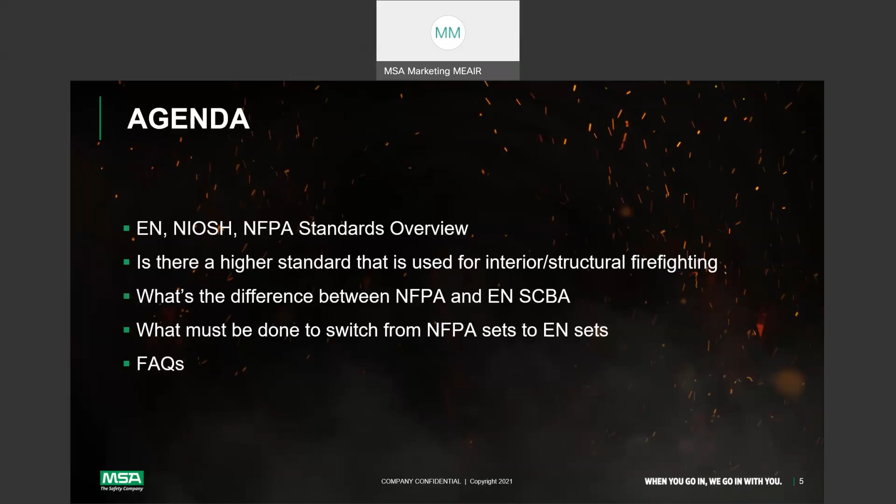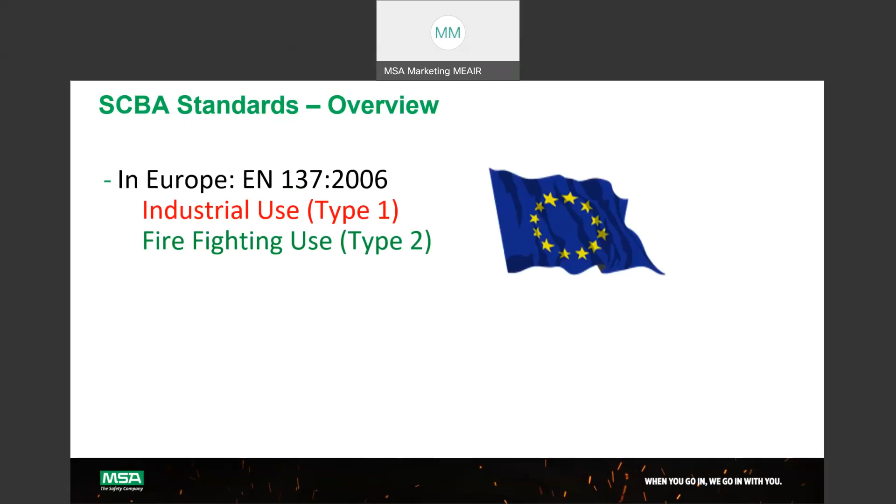First, let's have a very high level standards overview. When we talk about SCBA standards, one is on the European side, the other on the American side. On the European side, we see EN 137:2006, that is quite common. Under that, for industrial use type 1 is preferred, and for firefighting use type 2. Similarly, in the USA, NIOSH 42 CFR Part 84, Code of Federal Regulations, for industrial use, plus NFPA 1981, 2018 edition for firefighting use, which includes CBRN testing.

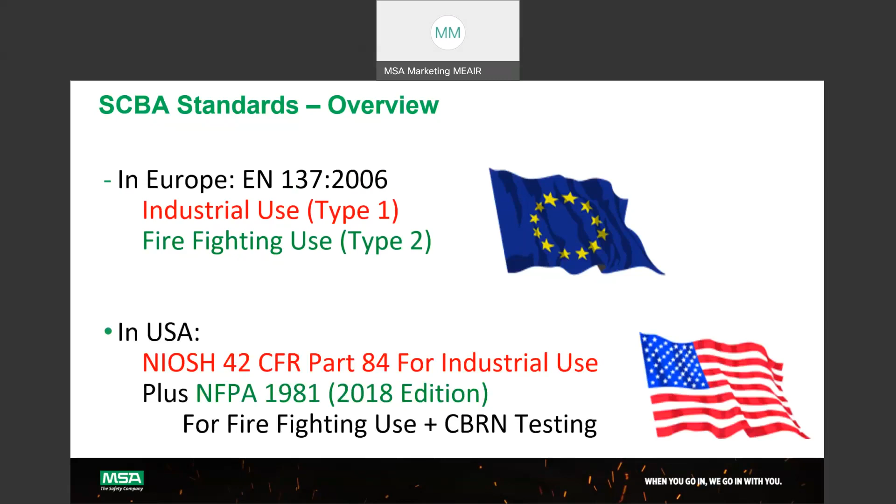One would wonder, what is this SCBA all about? SCBA, as most of you are aware, is a self-contained breathing apparatus set. Sometimes in the field, people simply say BA set, or SCBA, or CABA, compressed air breathing apparatus. Self-contained breathing apparatus sets manufactured for firefighting, safety, search and rescue applications are certified to safety and health standards worldwide. Regulatory requirements and voluntary standards used by many nations for approval fall into two major groups: North American and European.

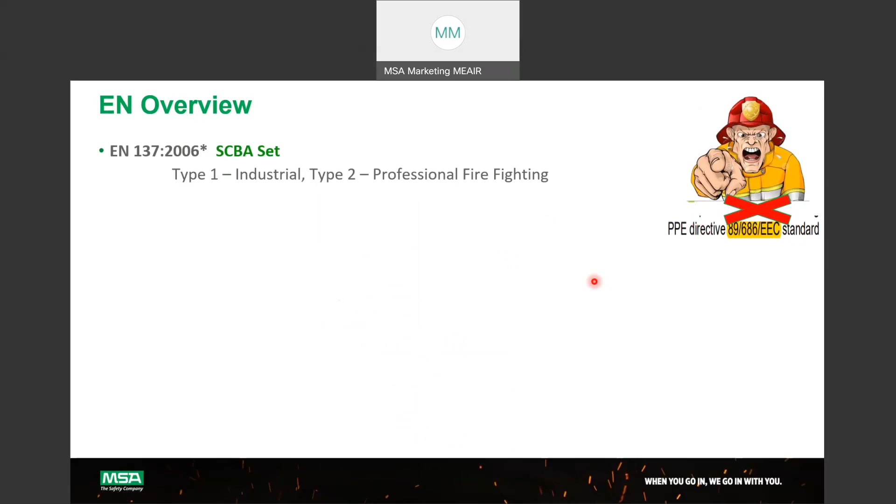So let's look at the European side, the EN 137:2006 SCBA set. If you happen to look at specifications for an SCBA in compliance with PPE Directive 89/686/EEC, this is no longer valid, and it has been changed to the new directive. We will have a look at that in the following slides. Type 1 is for industrial use, type 2 for professional firefighting. What is interesting in the EN SCBA set is that, though we simply say EN 137:2006 compliant, the individual components like the face mask and cylinder valve each have their own standard they comply with.

For the face mask, EN 136:1998 is followed. Under that, we have class 1, class 2, class 3, and class 3 plus. 1 and 2 are general use, short-term use, and 3 for special applications. Firefighting is considered a special application, so your mask shall have class 3 certification. Class 3 plus means the product goes through the flame engulfment test. So most masks will have class 3 plus.

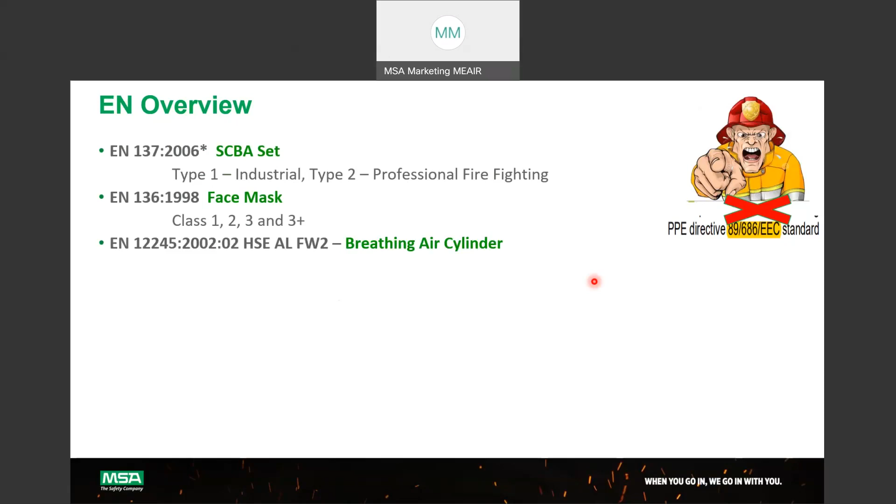For the breathing air cylinder, we have another standard, EN 12245:2002. Under that, we have type 1, type 2, type 3, and type 4, the latest one. Type 1 and type 2 are quite common: steel or aluminum cylinders. The most popular at the moment is type 3, which many customers call a lightweight or carbon composite cylinder. That means you have an aluminum inner liner. We will see that in the following slides.

Type 4 is gaining popularity. Type 4 is a PET cylinder. That means the inner aluminum liner of the type 3 cylinder is replaced by PET, polyethylene terephthalate. That provides light weight and hygiene. There are certain features we will also look into.

For the cylinder valve, EN 144-1: part 1 threaded connection, part 2 outlet connection. Mostly our point is on part 1. The cylinder valve has additional features or components, depending on the customer's requirement.

These options are incorporated into the cylinder valve. The first one is an EFV. EFV means excess flow valve, and then an integrated pressure gauge, and then overpressure protection or the burst disc, and then a ratchet, spring-loaded or anti-closure mechanism. People simply call it a locking valve.

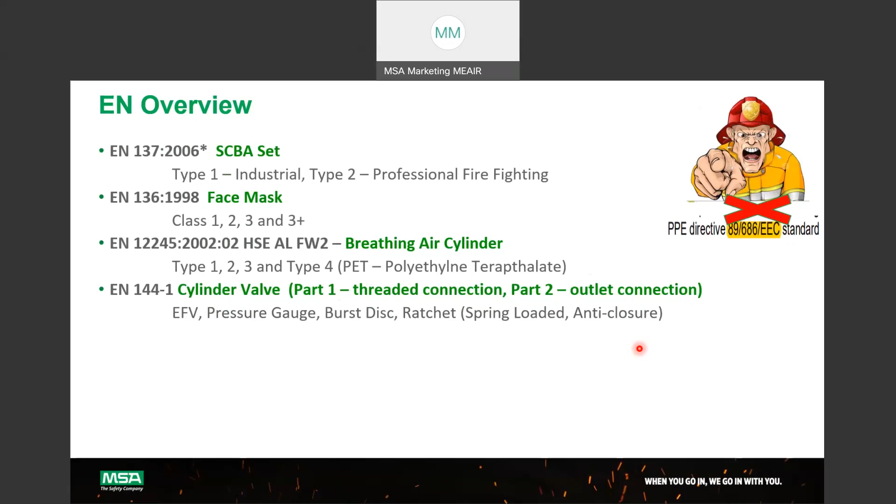So it is normally open, and if you want to close it, you need to pull and twist or turn. This is quite handy, especially for customers when they use the cylinders in confined spaces, or if they are going through a narrow space. It prevents accidental closure of the valve. And the integrated pressure gauge obviously helps you understand the high pressure inside your cylinder. The burst disc obviously helps with overpressure.

And for breathing air quality, we have EN 12021; 2014 is the latest one. Under this breathing air quality standard, you test water, oil, water vapor, oil mist, CO, CO2, odor, taste, plus oxygen. These substances have to be tested periodically, once in 3 months, once in 6 months. The standard calls for a specific period, and many customers implement it according to their usage in the field.

Okay, the new PPE directive is here, Regulation (EU) 2016/425 of 9 March 2016, that covers the design, manufacture, and marketing of PPE, that is personal protective equipment. When we say EN, the European Committee for Standardization, or simply CEN, an international non-profit trade-related association, provides a platform for the development of EN standards and other technical specifications. Common European standards reach a large population with reduced development and testing costs. CEN offers voluntary European standards, ENs, such as EN 137:2006.

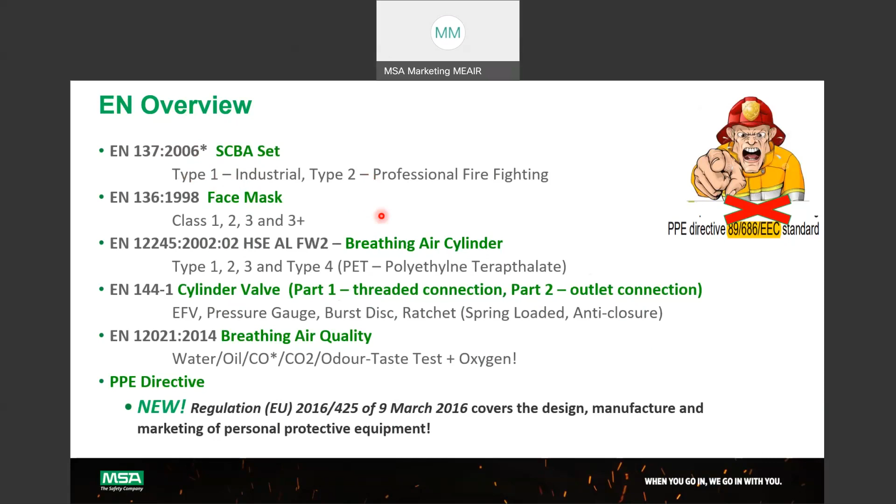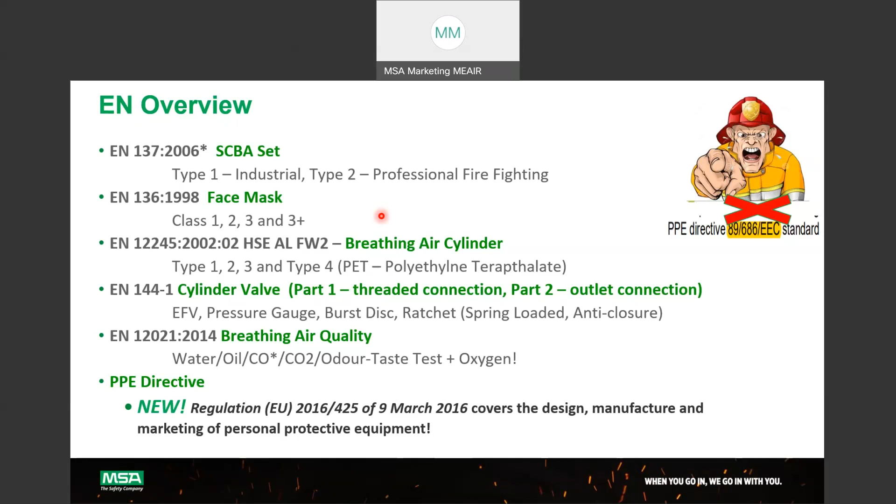Moving on to the other side, that is NFPA 1981, 2018 edition. In NFPA, once in 5 years they review the standard and upgrade it based on customers' and manufacturers' feedback. Most of the sets supplied in the market are 2013 edition. From the MSA perspective, our G1 SCBA is 2018 edition approved. But when we supplied it from 2014, 15 until 2019, most of the features had already been included. That means the unit was almost compliant with the 2018 edition, except one point, which we always talk to our customers about: the universal emergency breathing supply system, or simply UEBSS.

Then when we look at NFPA 1982, this is a separate standard that talks about man-down situations, mainly for electronic devices. NFPA 1982 is standalone in that it is not required for an SCBA to be NFPA 1981 compliant. And for industrial applications, obviously NIOSH 42 CFR Part 84 is the one. When it comes to the additive standard for firefighting, it is high-level performance.

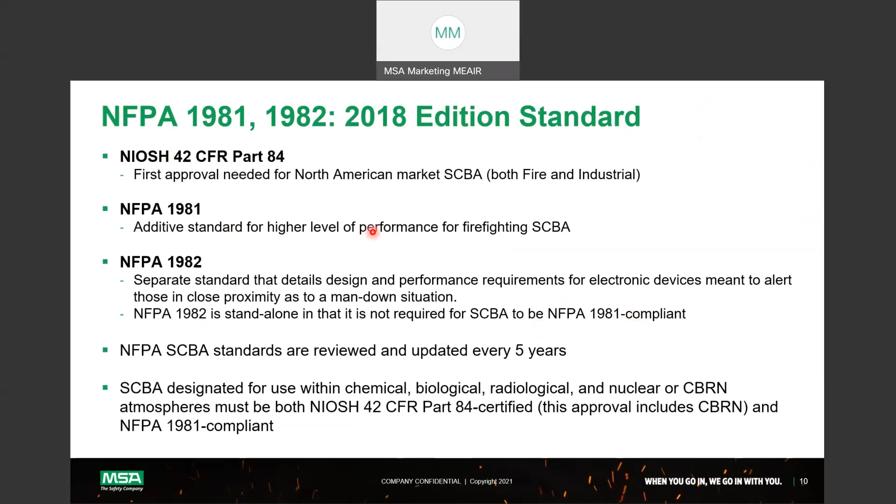Now the question comes, is there a higher standard that is used for interior firefighting? We have seen the EN standard and NFPA for firefighting: EN 137 Type 2, and NFPA 1981 edition 2018. To answer this question, it makes sense to compare the standards between EN and NFPA. The following slides provide a high-level overview of how the tests are followed for both standards.

For the flame engulfment test, the preconditioning temperature is 95 degrees centigrade for 15 minutes in the US, and in Europe, 90 for 15 minutes. Then you can see the 15 centimeter drop after flame, similarly for Europe, but the maximum after flame is 2.2 seconds, and here 5 seconds.

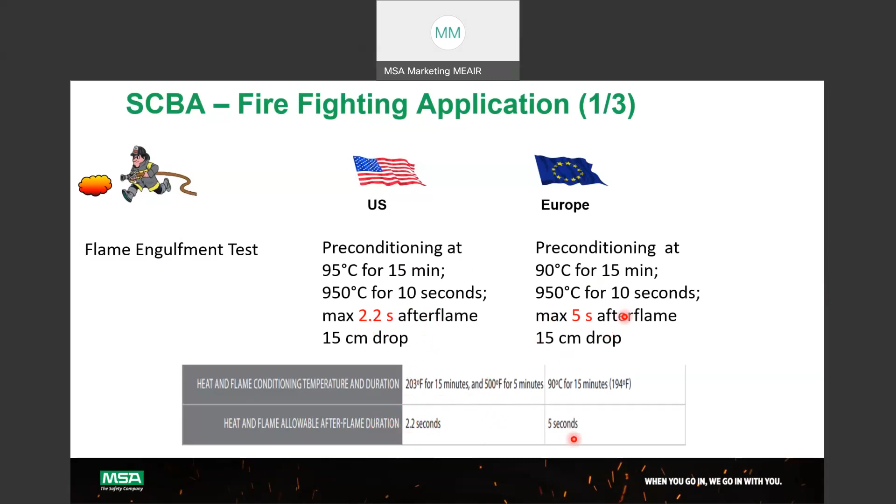So this is what we have compiled here. Heat and flame allowable after flame duration is 2.2 seconds for NFPA, and in Europe it's about 5 seconds. Similarly, if you look at the CBRN performance, on NFPA it was required and mandatory, but when it comes to the European EN standard, it is optional.

But for MSA, the M1 SCBA, the new model we offer from our European platform, has been approved and certified to CBRN performance. That means when you configure your M1 SCBA, you will be able to select CBRN certification. When you select that option, the product is delivered with a label complying to the CBRN performance.

The other interesting point is about a heads-up display inside your mask or face piece. This is required on the US side. When it comes to Europe, this is optional. A few customers are offering it as an add-on version, and a few customers also provide visual images inside the unit.

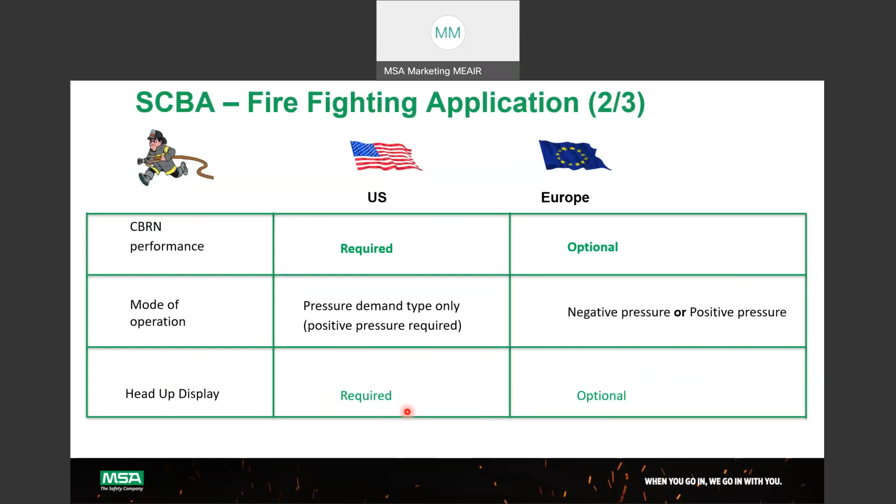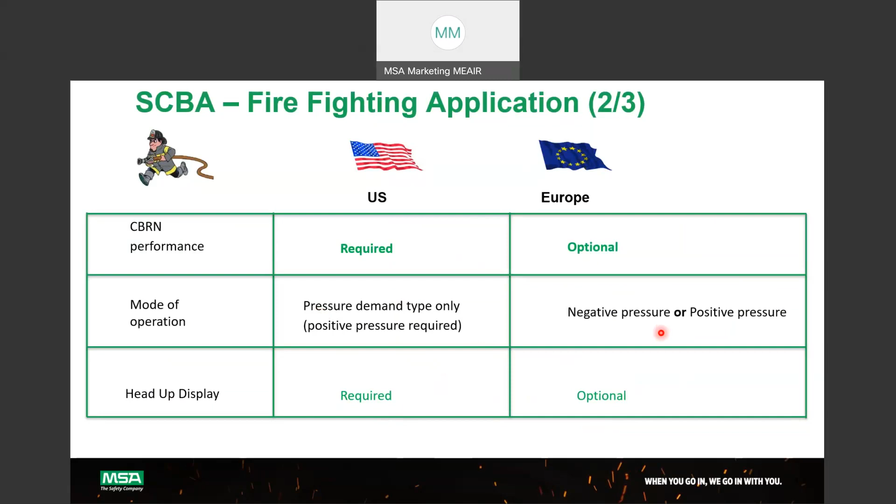In terms of mode of operation for firefighting applications, it's always pressure demand type, that is positive pressure. When it comes to Europe, you have negative pressure or either positive pressure. When you say positive pressure, the pressure inside your mask is always higher than your ambient or atmospheric pressure.

When talking about usage in explosive atmospheres, you can see the electronic components, like here, the 1982, the tests or the specific requirements. And when it comes to Europe, you also have other specific requirements.

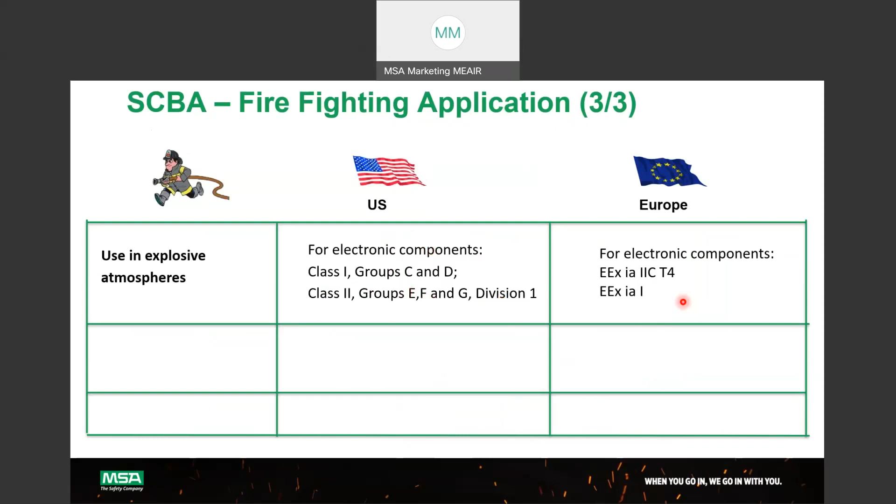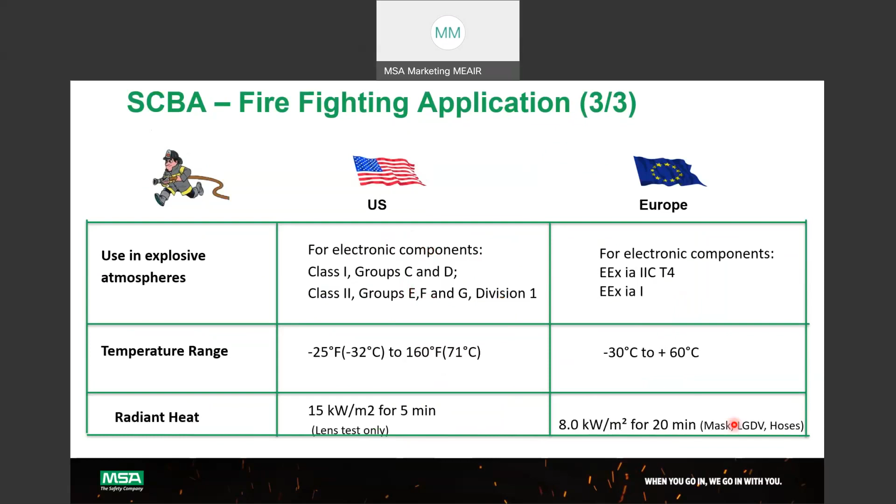Similarly, the temperature range testing and the radiant heat testing, particularly for your lens and the face piece, and also on the European side for your mask, the LGDV or lung governed demand valve, and the hoses, you've got different radiant heat test parameters. This is on the firefighting side.

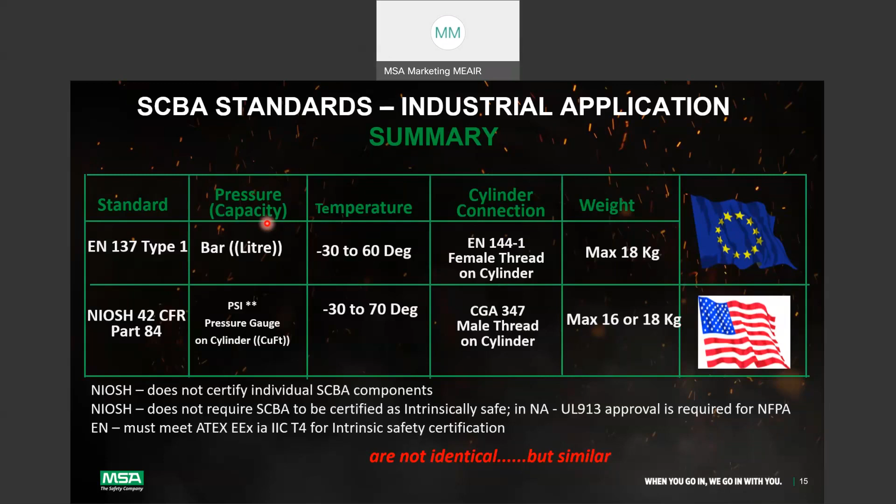If you look at overall, comparing the standards, they're not identical, but they look similar, right? Then you ask, what's the difference between NFPA and EN SCBA? Having seen the standards and looked at what they are, when we look at the difference here, in terms of SCBA basic requirements - let it be breathing resistance, airflow requirements, CO2 content of the inhaled air, or the low pressure alarm or low pressure warning whistle.

Generally, on the European side, if you're using a 45-minute set, you can use it for 35 minutes of working duration, then 10 minutes for your safe duration, that is for escape, getting back to your safe area or assembly area. So like that, 35 minutes and 10 minutes. If you see a cylinder with 45 minutes duration, that means you can effectively use it for 35 minutes, and then in the last 10 minutes you have to get back to your assembly area or safe area. So that last 10 minutes, you will get that warning whistle.

Typically, when the pressure gauge drops down to 55 plus or minus 5 bar, that means 50 to 60 bar, you will get an alarm. That means the warning whistle starts whistling, so then it is understood that you need to get back.

Similarly, on the American side, once the pressure in your cylinder drops down to 33% of filled pressure, then the warning bell or sound happens. That is an indication that it is time for you to get back to your safe area. 30 to 33% of the filled pressure. So these are not identical, but similar. This is the overall similarity here.

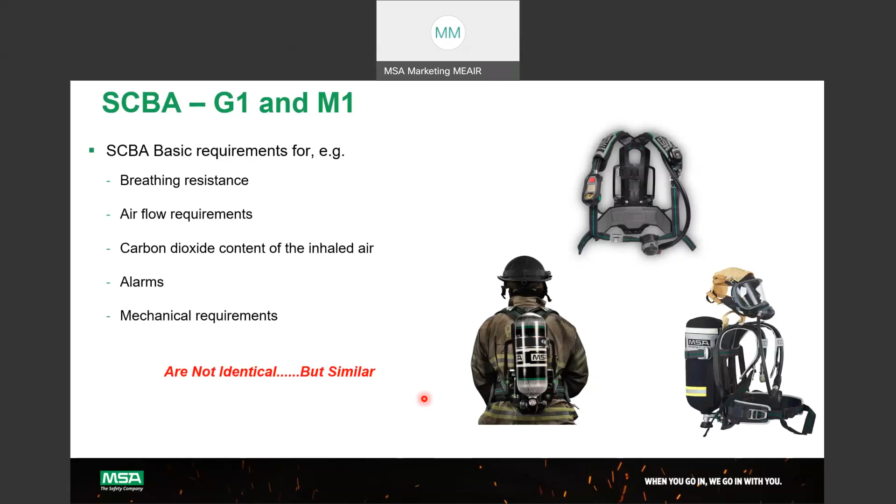Then what about when we start comparing the EN SCBA and American SCBA? We have seen the similarity, not identical, but similarities there. First, let us look at the component level.

The first one is about the face mask or face piece. The terminology usually followed in the European industry is face mask or full face mask, but on the American side they call it a face piece.

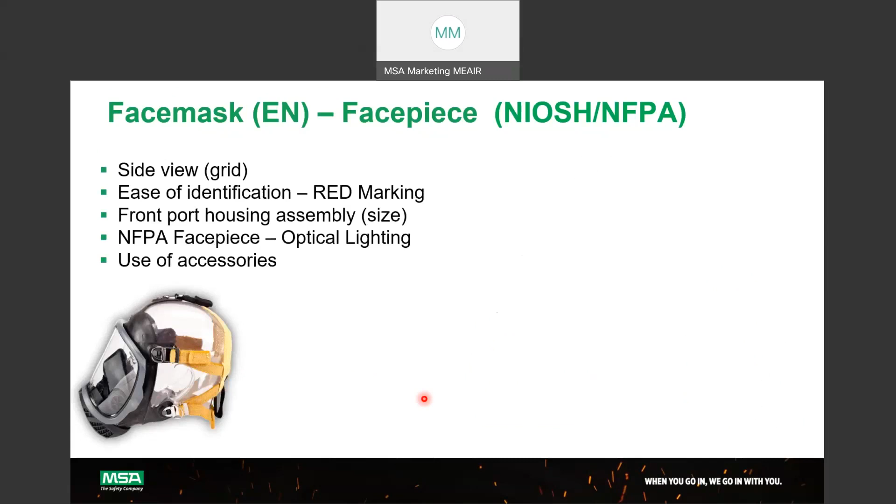When comparing the mask availability for both European and American, we have one mask called the G1 platform mask. On the European side it's called mask, on the American side face piece. So we provide the G1 face mask for European side, G1 face piece for American side. These two masks cannot be interchanged because the front housing or front port housing, which includes your demand valve holder, is totally different.

When it comes to the American side G1 face piece, it has a heads-up display, so obviously the optical lighting and everything makes it look a little bulky. It cannot be fit onto your European mask.

For ease of identification at the field, if someone has a mix of both European and American sets, the European mask has a small red marked button. From there, we can easily understand that this is a European mask, whereas in the American mask you do not see that kind of red marking. And the optical lighting is obviously there, which is not available on your European mask.

In terms of the side grid on the side, because of the front port housing, it is a bit bulky for your face piece. You can see the grid size and numbers are higher, and the size is different, so you cannot use it interchangeably. Though a few components like the inner mask, head strap, or harness can be interchanged, the front port housing and the grid cannot.

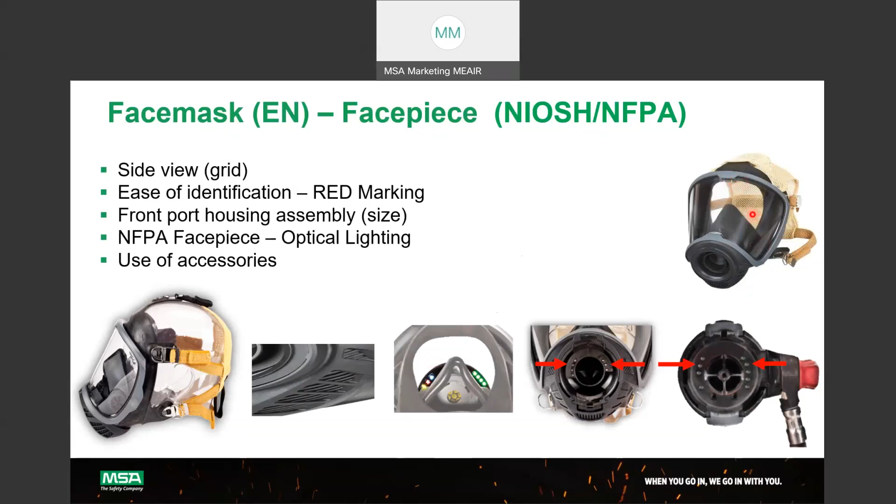The product will be supplied with optional accessories like the optical kit or spectacle kit. If someone wants to use this SCBA or mask with their reading glasses on, we supply that spectacle kit, which can be fixed over there. It fits nicely for the users.

When we look at the cylinders, on the European side pressure is noted in bar, but on the NIOSH and NFPA side it is always noted in PSI. The cylinder water capacity starts from 0.8 to 12 liters, and the 50 liter used for airline trolley units, with pressure always indicated as 200 bar or 300 bar. But when it comes to capacity on the American side, it is known in cubic feet. 1 cubic foot is approximately 28.32 liters.

On the cylinder you can see the marking here: if it's a 30-minute cylinder, you'll see 45 cubic feet. If it's a 45-minute cylinder, you see 66 cubic feet. A 60-minute cylinder, obviously you see 88 cubic feet. The low pressure is 2216 psi, and high pressure is 4500. Also, 5500 psi is offered as well.

We have seen on the European side types like type 1, type 2, type 3, and type 4 - that is steel cylinder, type 3 carbon composite, and type 4 PET cylinder. When it comes to the American side, we have two.

One is the aluminum cylinder, usually used for low pressure. Then the carbon composite, which we also provide for low pressure. And then ultralight carbon composite cylinder is provided for high pressure, like 5500 psi.

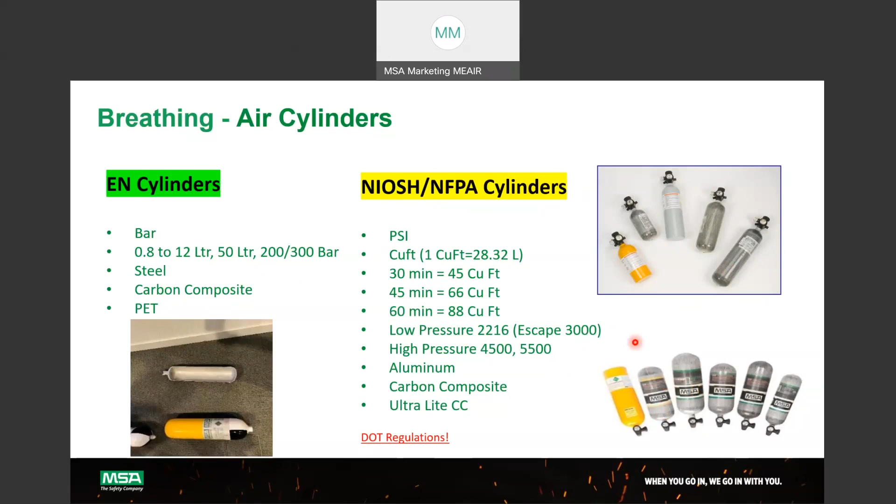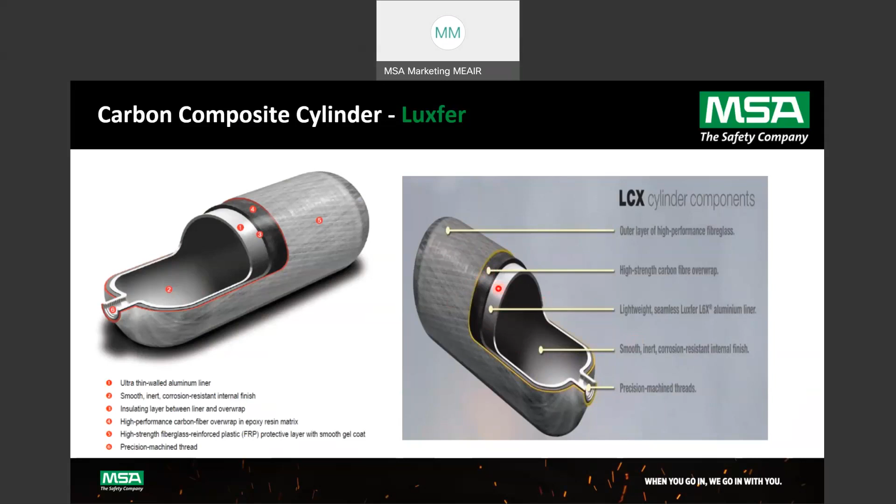And the cylinder is provided with NLL, that means non-limited lifetime. So once in 5 years you carry out your hydro test, and then everything is fine, you can continue to use that type 4 cylinder. This is non-limited lifetime because it has no steel, aluminum or any metal materials, so it's corrosion free, hygienic, pure, and the maintenance is quite easy.

Someone is using a cylinder valve here and they didn't pay attention. They increased the torque, using higher torque than the permitted level. Then what happened? The cylinder neck portion gets cracked. So the moment the crack happens on the type 3 cylinder, that means the cylinder has to be condemned.

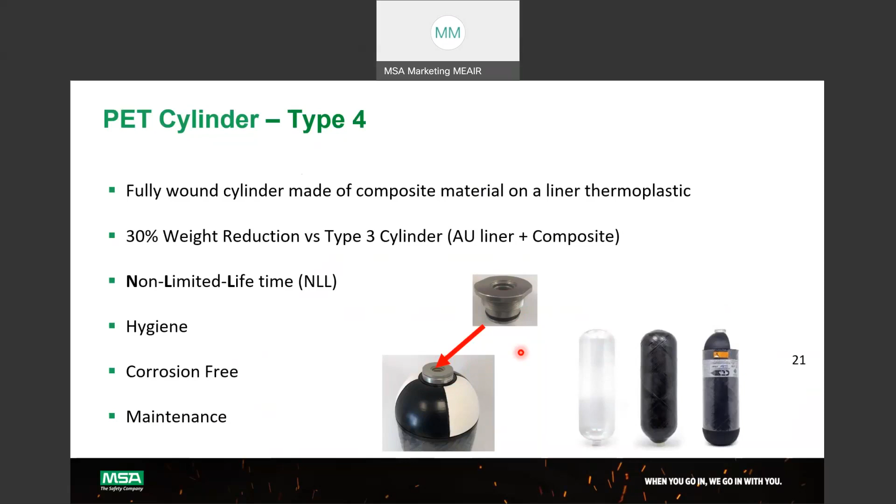MSA is offering type 4, type 3 cylinders for use with SCBA. We have tested specific cylinders, specific branded capacity cylinders. Everything is available in our product certification. We would be more than happy to share that with you.

And on the EN side, we do offer European cylinders with limited lifetime. That means 15-year cylinders, 30-year cylinders we offer, and also NLL, non-limited lifetime. Particularly on type 4, all cylinders are NLL.

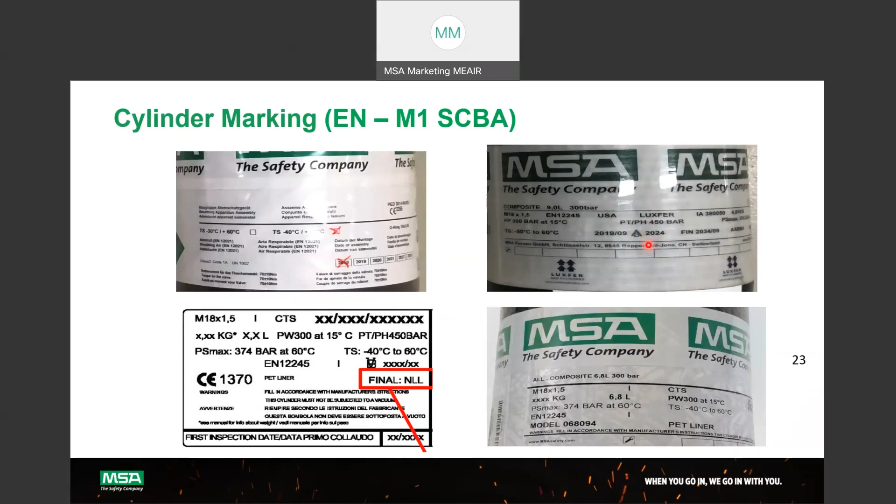We have seen components like the mask, cylinder marking, and cylinder valve. There are different types of cylinder valves available: popular inline, straight, and cross flow valve, right angled or 90 degree. But the most popular nowadays, followed by customers, is inline.

That is what MSA is offering. MSA also offers cross flow and right angled valves. But the most popular, like I mentioned, is the inline valve. Let us understand what are the types of valves.

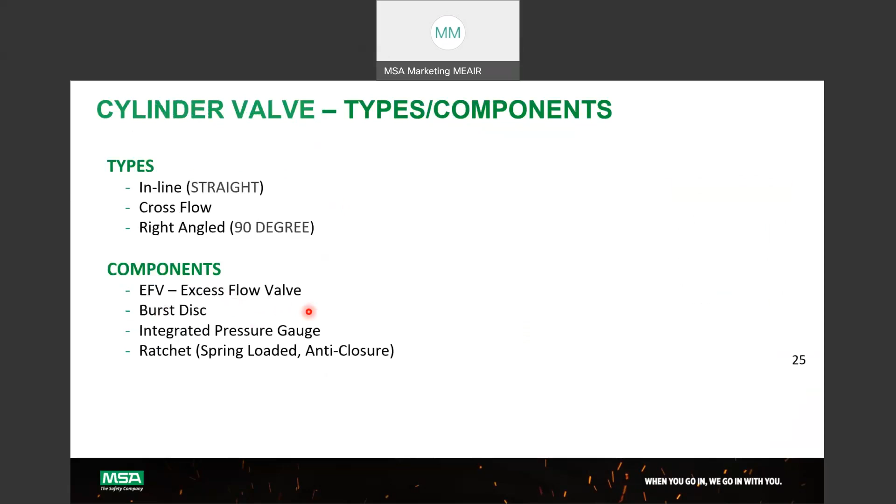Again, the components, we have seen terminologies like EFV, excess flow valve, burst disc, and integrated pressure gauge ratchet. These are optional features offered along with the cylinder, subject to customers' requirement, application, and their interest and budget.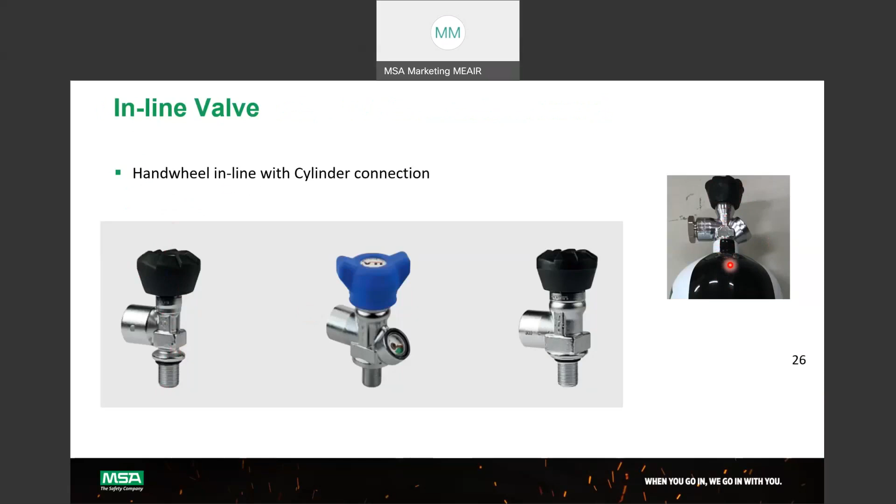This is your inline valve. This is the most popular in the industry. It's followed by many of our customers. When you look at the cross flow valve, that means the hand wheel, you can see here, the hand wheel is in line with the outlet connection. That means, if you want to refill the cylinder here, you use that to refill the cylinder. So this is here, the hand wheel in line with outlet connection. That is your cross flow valve.

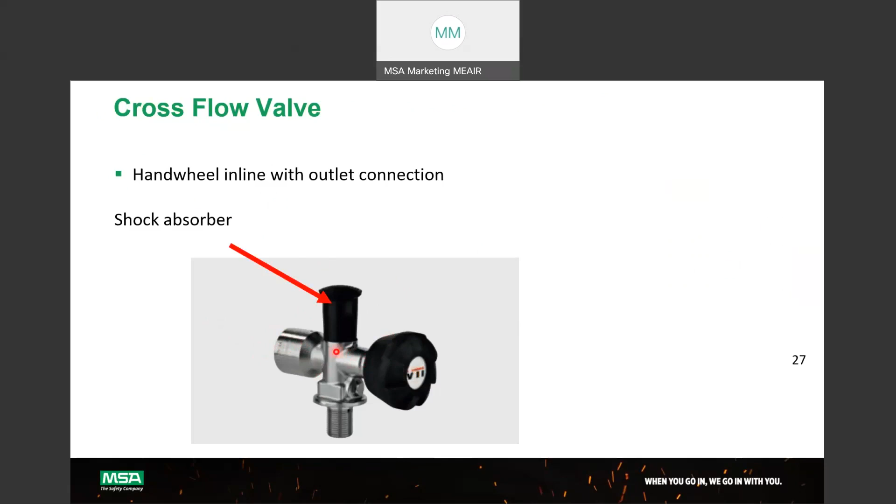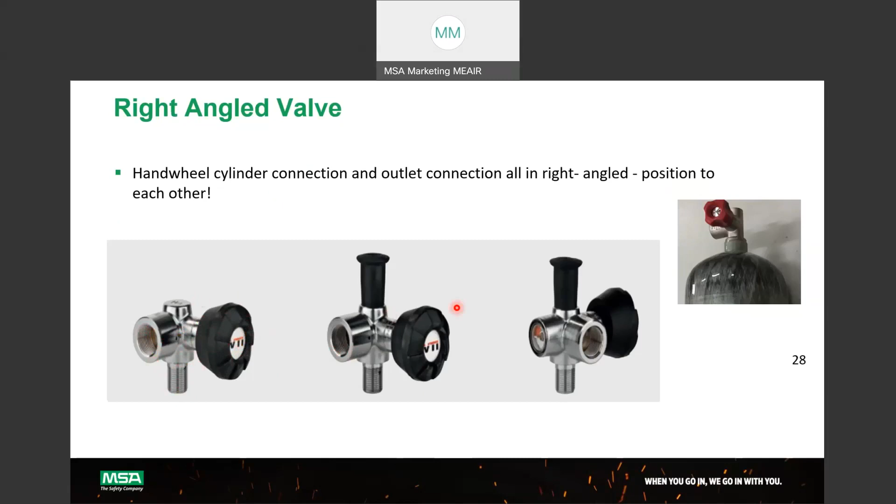When it comes to the right angled valve, here the hand wheel is right angled to your cylinder threaded connection, right? You see here? So the hand wheel, cylinder connection and outlet connection are all in right angled position to each other, right? So here, here, here. So this is what we call a right angled valve. A few images for ease of understanding. You can see the right angled valve, inline valve.

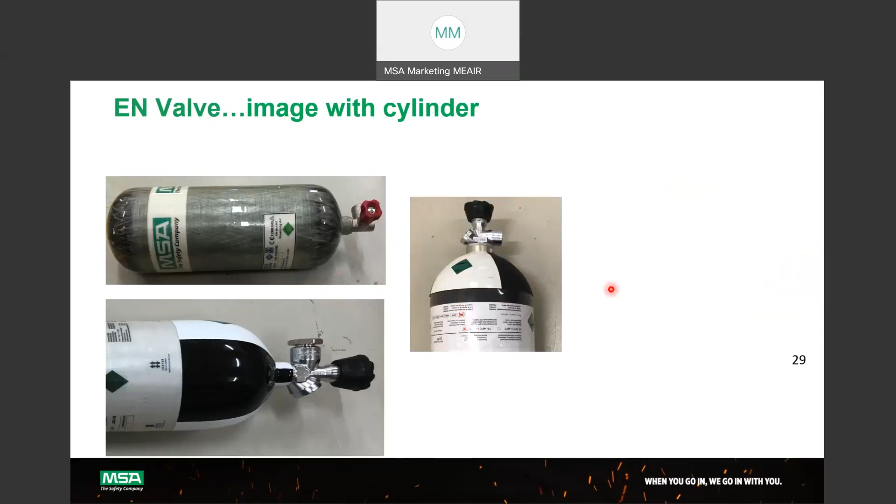Okay. And then the optional features we offer for the cylinder valve. You can see here the integrated pressure gauge. From this, we can easily understand what is the pressure inside your breathing air cylinder. You don't have to take this cylinder, fit it onto your SCBA, open the cylinder valve and look at the pressure gauge to see the pressure inside your cylinder. That is typically what was followed in the past. But now, since you have this option, you can easily see the pressure inside your cylinder without opening the valve. All right, that's the integrated pressure gauge.

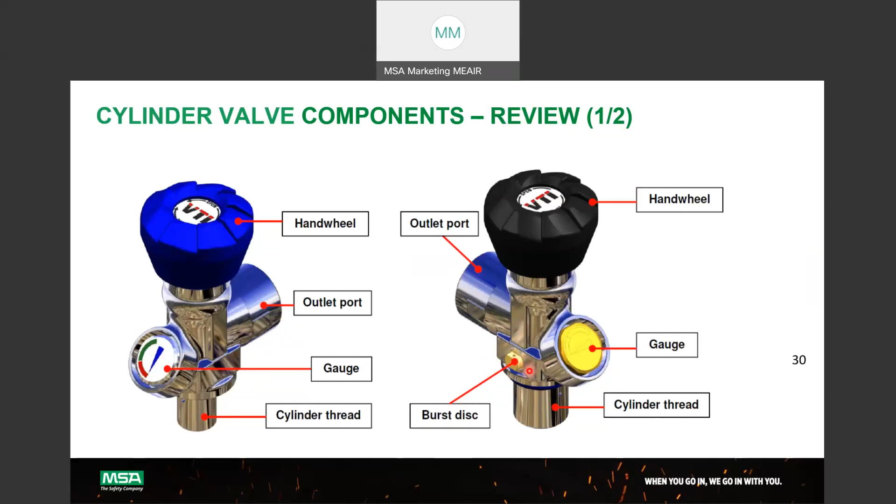Then what we have is the burst disc. Say someone has lost their attention while refilling, and the pressure got increased more than the specified pressure. So in order to prevent the cylinder bursting, the burst disc is provided here, right? And then we have a few other points. The other one we talked about is the excess flow valve, right? The excess flow valve is here. We will also see what options are available.

And the other one we talked about is the ratchet. The ratchet is normally here inside the valve. So in the valve itself, you have a spring-loaded or anti-closure. That means, like I mentioned, you can normally open, but in order to close, you need to pull and turn. Okay, pull and twist. So with this, it is quite handy for you to use the cylinder or SCBA in confined space or narrow space. It's quite handy.

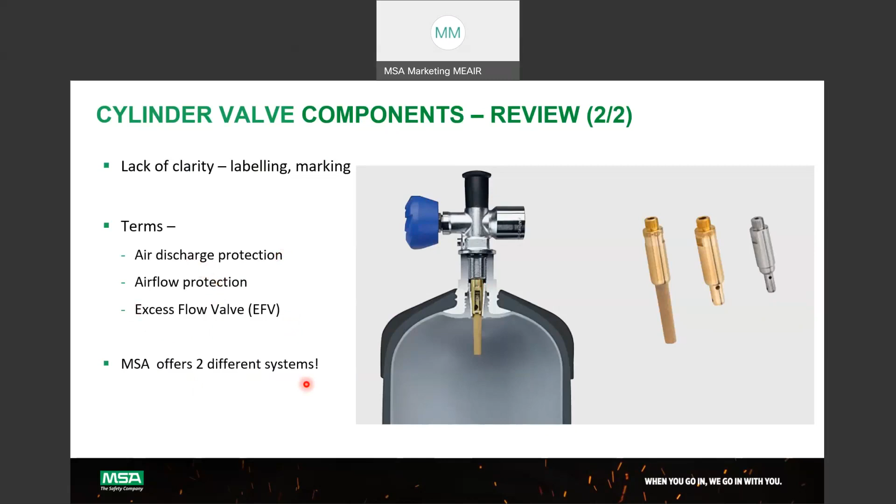When it comes to the excess flow valve, there are different terminologies: air discharge protection, excess flow valve, airflow protection. But MSA offers two different systems here. What are they? Suppose the cylinder is erroneously dropped, and the valve is broken. When it happens, a small amount of air escapes through the cylinder valve, and the cylinder pressure is dropped down. Because of this, it protects the cylinder against spiraling or becoming a projectile, and it reduces the risk of injuries.

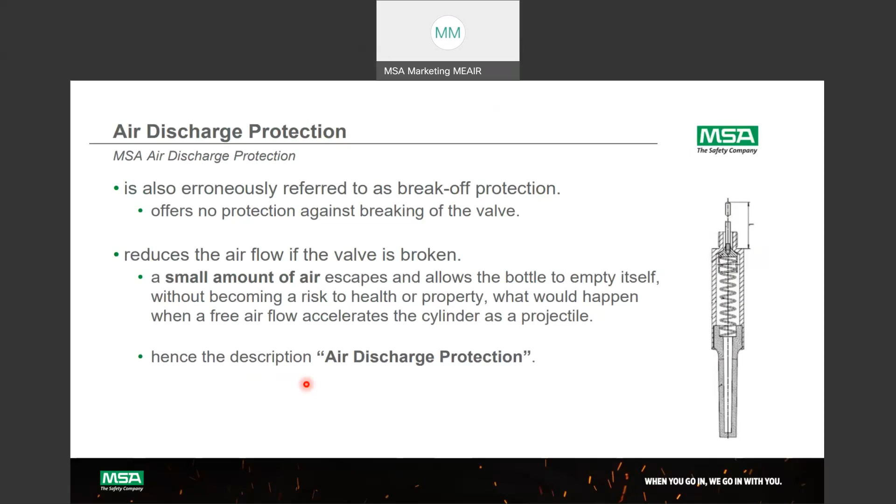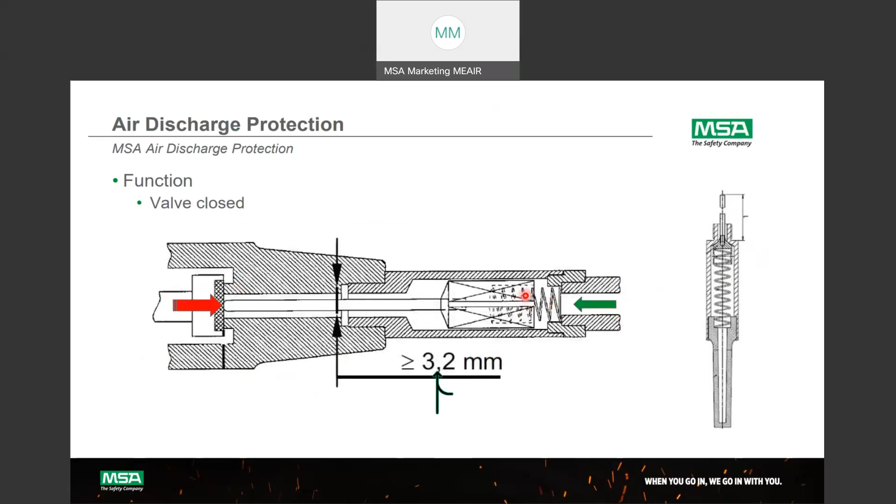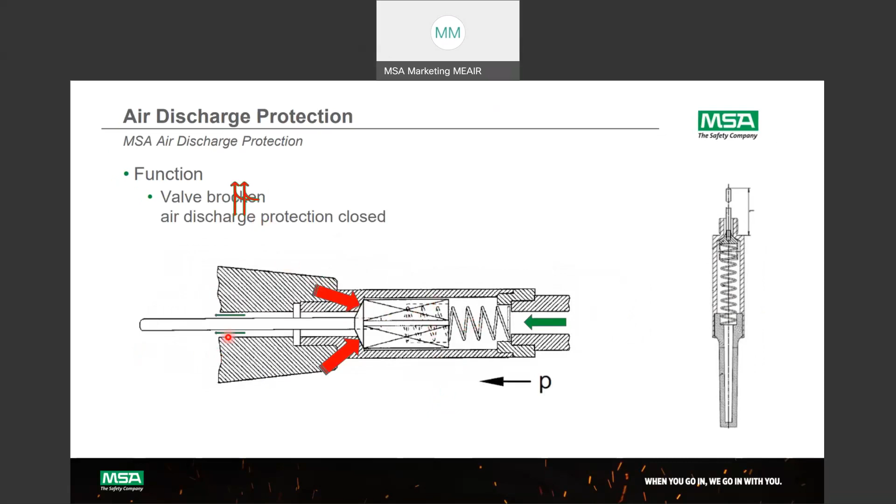And how it functions: when the valve is closed, you can see here the pressure here, and this is where your air discharge protection is. Once the valve is open, it normally allows flow. Then when the valve is broken, the air discharge protection is closed, allowing a small amount of air to go out of the cylinder, right? This is the air discharge protection.

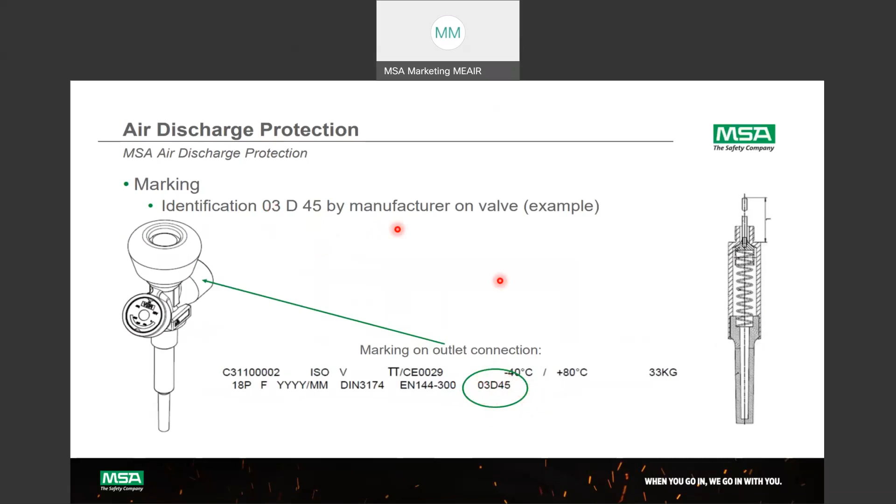How can we identify whether it has air discharge protection? Simple, you will see a marking here, 03D45, like a stroke number segment, the batch number. So based on that, you can identify. Normally from MSA, you can see 03D45 by the manufacturer on the valve segment, stroke number, like that.

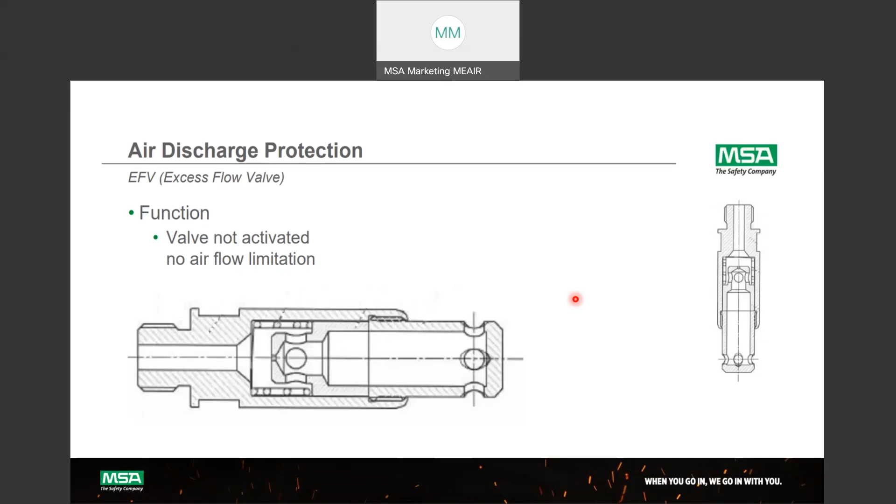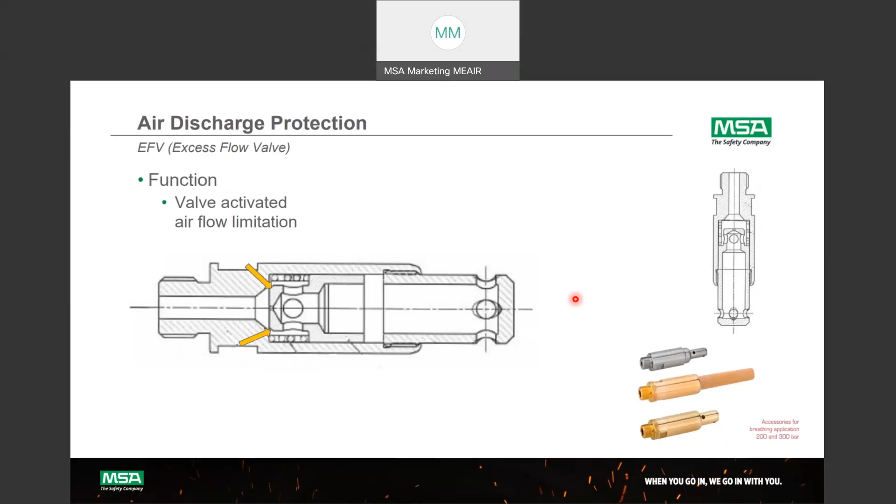And the excess flow valve: when the valve is not activated, no airflow limitation. Sometimes customers also say airflow limiting option or airflow limiting valve. When the valve is activated, airflow limitation. And the safety function? When the valve is broken, the EFV is activated. When the valve is opened unintentionally, again the EFV, the excess flow valve, is activated. A large quantity of air flows out, and the breathing air cylinder gets empty with no risk to health or property.

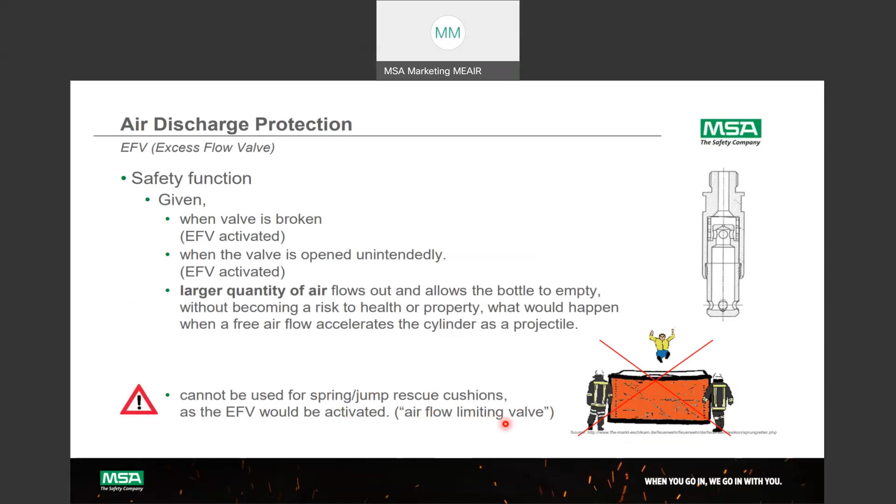Like we talked about, what happens if there is no excess flow valve? Then the cylinder starts spiraling. The cylinder becomes a projectile that will result in injuries to the users. And then obviously it cannot be used for spring or jump rescue cushions. So what happens when this is followed? Then immediately the EFV would be activated, that is the airflow limiting valve. How to identify that?

Without any regulation or norms, normally when you see the valve handwheel in a blue color, that indicates the installation of your EFV, right? So when you have a black color handle, then you can understand it may or may not have. It depends on the manufacturers, but in the industry, it is popular that you have a blue color handwheel. That identifies that, okay, this valve has the EFV.

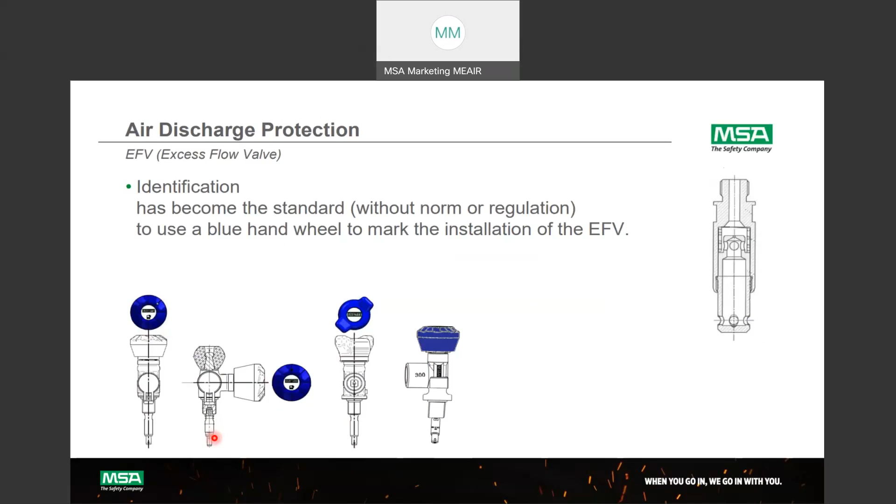Now, we have seen the features. We have looked at the specific standards and then the components and then the features. Obviously, customer would ask, okay, how to select cylinder plus valve? You need to look at your application, whether you're going to use your SCBA for a simple compliance purpose. That means you never know when you're going to use your SCBA. That's only there for compliance purpose, like a wall hanger.

Someone says, no, we have a mandatory use once in a week. We need to do this. Someone quite often uses it for, say, search and rescue applications. We use our set for firefighting applications. 24/7, the unit should be in ready to use condition. Look at those applications. And then cylinder capacity plus pressure rating. You want to use your SCBA for 30 minutes, 45 minutes, or 60 minutes. And then low pressure or high pressure.

Cylinder valve, do you need to have options like an EFV, integrated pressure gauge, or ratchet type? And then what we always recommend, look at your local regulations and statutory requirements. Most of the energy producer companies have got their own PPE policy, protective equipment use policy, safety legislations. So look at those regulations, legislations. Based on that, you need to finalize your SCBA.

Also, you've got different sets of cylinders, and then you want to use those cylinders with, say, M1 SCBA, that is a European SCBA offered by MSA. And then we support to test that particular cylinder with our M1 SCBA so that we provide the product compatibility test, third-party test certificate. You can continue to use our M1 SCBA without discarding or condemning your existing cylinders at your fleet. Obviously, budget, that is an important point.

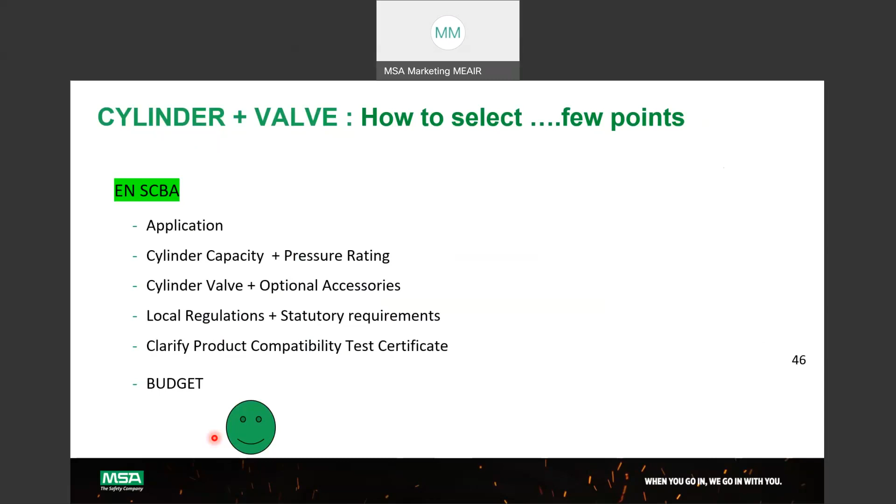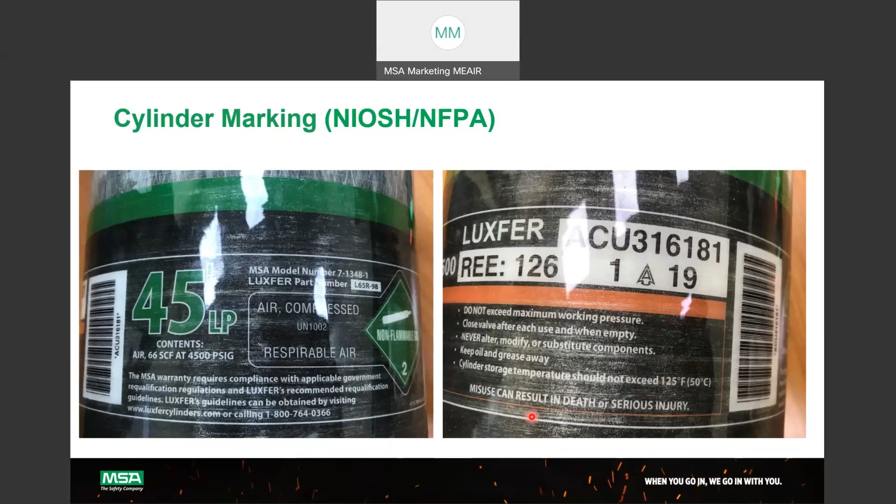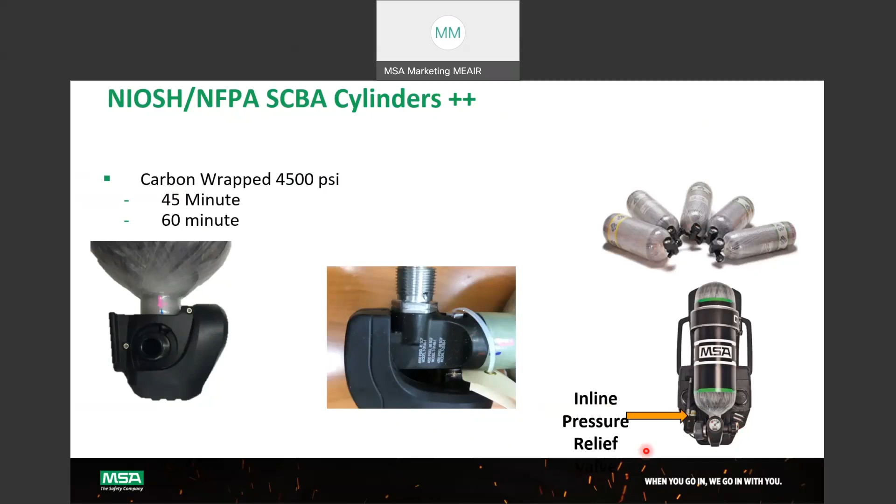When it comes to cylinder valve, a few points are mandatory, like the burst disc. You can see here the burst disc is mandatory on your cylinder valve, and also the integrated pressure gauge. So the integrated pressure gauge and burst disc are obviously offered. What is another important point here is the ratchet, or here on the NFPA NIOSH side, people call it a locking valve or non-locking valve. Locking is nothing but your ratchet type. And then obviously the inline pressure relief is also offered in the sets.

Look at the connection types we offer. On the European side, we provide a quick connect. The terminology in the European SCBA set we follow is alpha click. But on the NIOSH or NFPA side, we do provide a threaded connection and then quick connect options. A quick connect helps to change the cylinder quite easily at the fleet.

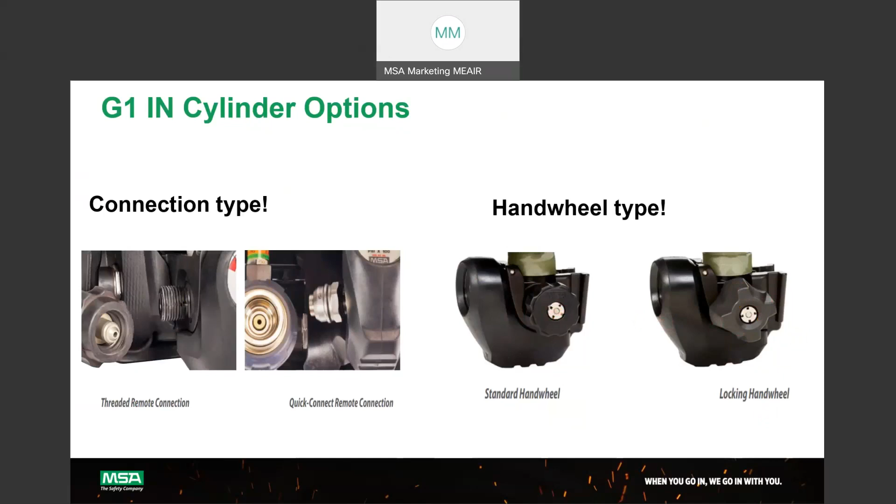And the hand wheel type, it's a normal standard hand wheel. You can see a circular one, and then the locking, you see like a square. This indicates the difference between the standard wheel and the locking hand wheel options. That is a ratchet wheel. Okay, we have seen the components level. Then what sort of options are available to compare both European SCBA and American SCBA?

When it comes to MSA G1 NFPA and European M1 SCBA, we provide configurable options. That means you can use our assemble to order online configurators. You can select the components subject to your application. For example, the harness. Someone is saying, I'm going to use your SCBA for search and rescue applications, but it will be very close to the boiler area. So the environment is always warm or hot. So you can go for harness material like Kevlar.

And someone says, I'm going to use this only for industrial applications. I'm not going to use it for firefighting applications. So obviously you can go for standard fabrics. So based on your application, you can select a different harness.

So we provide flexibility in options, flexibility of options to select as per your requirement. We also provide the pressure gauges: simple analog pressure gauge, both analog and digital integrated pressure gauge, analog and digital pressure gauge with what we call the motion scout or the motion alert function. That means if the firefighter or the user doesn't move for 18 seconds, then it alerts against immobility of the user. So that is also available.

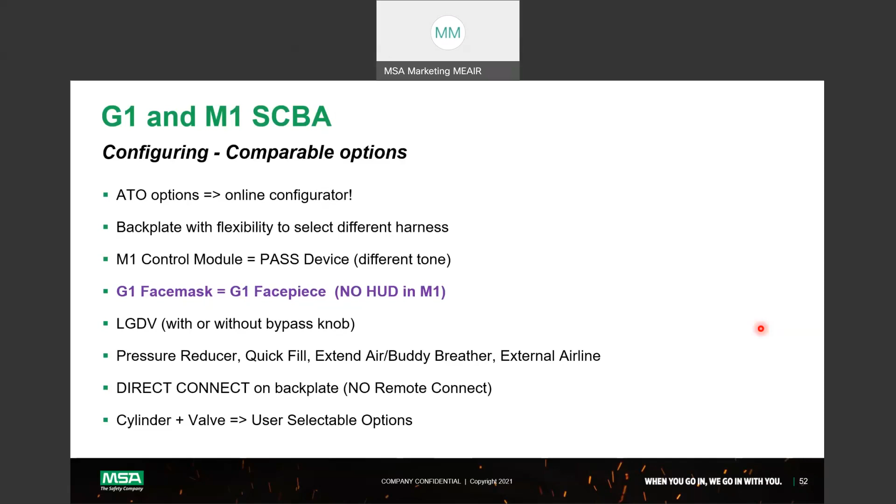And then the mask or face piece. We have the heads-up display in the American face piece. And the lung demand valve is also offered with the standard or the bypass. We do have those options. Pressure reducer, quick fill, buddy breather, and then external airline. All these options, like we talked about, remote or direct connect on the back plate. No remote connect option is available on the European SCBA. European SCBA is always direct connect on top of the back plate, just direct mounting. Then cylinder plus valve, user selectable options.

We are almost coming to the end of our session. One would ask this question: what must be done to switch from NFPA sets to EN sets? Yes, to switch over from NFPA to EN SCBA, obviously the compressor and the air quality test kit, smart check or the test station. You have different SCBA sets, so we need to have a different test station. MSA is offering two different test stations for European SCBA and American SCBA. Few brands are available in the market for both standards to test. Then service tools, and then obviously we provide CARE training, and documentation includes donning, doffing, and maintenance. When it comes to hydro test, it remains the same. Once in 5 years, you need to do the hydro testing of the cylinders.

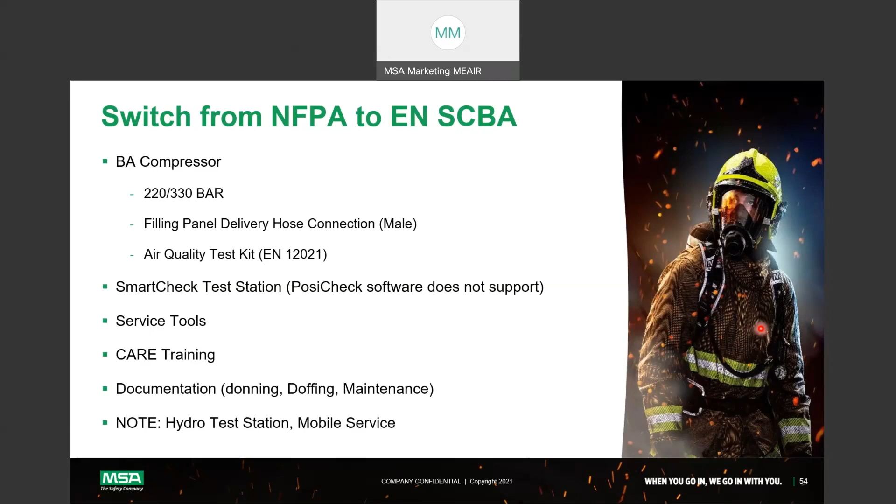I would like to end the session by reminding on M1 SCBA. That is going to be the future platform. It provides greater modularity, enhanced hygiene. You can easily clean the backplate and the components. Improved ergonomics, highest safety standard it is designed and manufactured to. Reduced cost of ownership. This provides great options.

Some customers are using our old SCBA and they want to use the same back plate, but they would like to go for the face mask and the lung demand valve. Yes, they can buy the M1 lung demand valve and G1 mask to use with the existing old SCBA like Ergo, Air Max units. The other way around, they say, okay, I would like to use our existing Automax lung demand valve and Ultra Elite or 3S mask with M1 SCBA. So we have product compatibility test certificates available, so you can mix and match in the fleet. This helps the customers not to invest money on each and every component. So reduced cost of ownership.

State of the art communication. We provide the telemetry, the connectivity options. We will talk more about it in the coming months. And then, like I mentioned in the beginning, CBRN approved M1 SCBA. Also, we provide Alpha Click for easy change out of cylinder in the field. Above all, a 10-year warranty is offered. We have fantastic documents prepared. All of them have been uploaded on our website. So feel free to access, download and look at those documents when it comes to warranty, user instructions, specifications, data, everything available on our website.